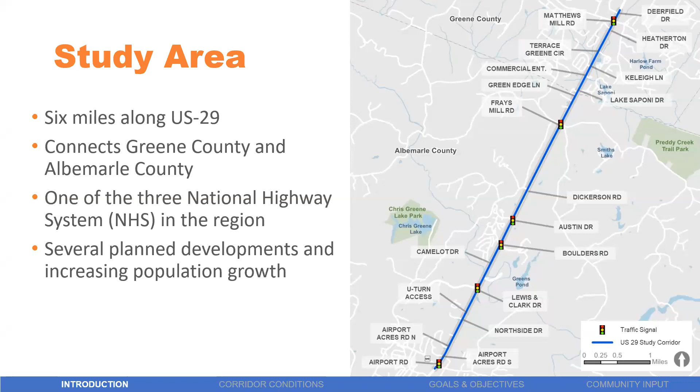Really, this project is intended to be multimodal, right? It's not just about moving the cars on US 29. It's really thinking about moving people through this corridor, whether that be by transit, by bike, walking, and of course vehicles as well. We're going to assess those future travel projections and development patterns and really understand in the future what that baseline condition is and what we need to solve and what we need to look at more closely.

Once we have that understanding, we will generate a range of solutions, improvements, and enhancements to address the study goals and objectives, and we'll share those with you in detail shortly. Again, really focused on several key elements: mobility, safety, economic development, you name it. And ultimately, we're going to test the application and the relevance of those solutions, bring those back to you in draft form, again, just like this, to gain and gather your input and feedback.

You are the users of this facility on a day in, day out basis. You know the corridor and the region better than most. And so your feedback is really valuable to the project team to help identify the proper and best solutions that meet the mobility and safety needs of the corridor, but also the community.

And with that, I will turn it over to, I believe, Andy, who's going to start us talking us through, or is it Kylie? I'm sorry. That's all right, it's Kylie. Okay, thank you Chris.

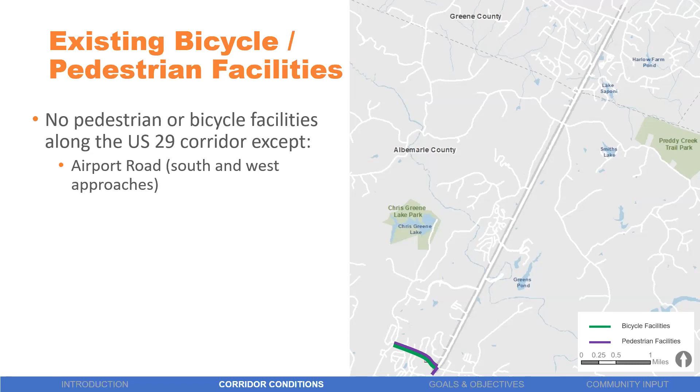Similarly, there is a lack of existing transit facilities on the corridor. So 2 transit services run in the vicinity of the study area, both of which are stakeholders of ours on this study: Charlottesville Area Transit, or CAT, and Jaunt. Jaunt runs a connect line for commuters into Charlottesville, and its closest transit stop to the study area is about 900 feet south of Airport Road, so technically out of study limits, but in the Hollymead Town Center by the Food Lion, while CAT's closest stop is 3 miles south of Airport Road at the Walmart off of US 29.

Now, shifting gears a little bit into crashes along the corridor, we pulled crash data from 2015 to 2020 to get a sense of existing safety conditions. There were 798 crashes along the corridor in that time within our limits. 33% of those reported injuries or fatalities.

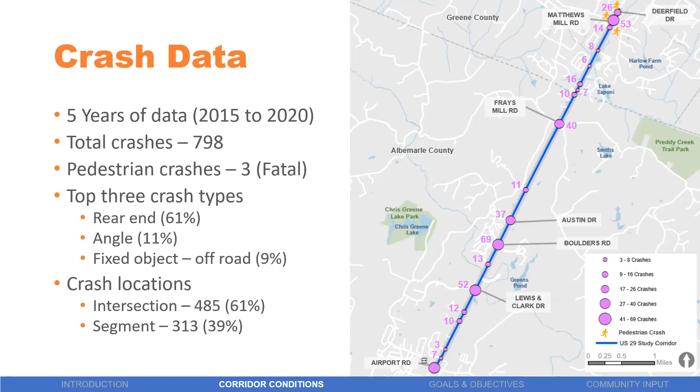The 3 fatal crashes all involved pedestrians between Deerfield Drive and Heatherton Drive to the north in Greene County. Rear end crashes are the most common type pulled from the data at 61%, followed by angle crashes and off-road fixed object crashes. So you can see from this graphic, most occurred at intersections, about 61%, whereas the remaining 39% occurred throughout the corridor, outside of 250 feet of an intersection.

So now I want to get into traffic operations, which analyzes essentially how a roadway is functioning. This graphic is helpful to understand the term level of service, which we will be referring to in the upcoming slides and in the public materials that you can also access on the project website. Essentially, level of service, otherwise called LOS, is a metric used to determine the quality, essentially, of an intersection.

It is based on a scale of A through F, where A is best - it's the ideal free flow conditions, you're all smiles, living the dream. And F is poor, significantly delayed conditions, very stressful. And so in urban conditions, we aim for a level of service D or better as engineers.

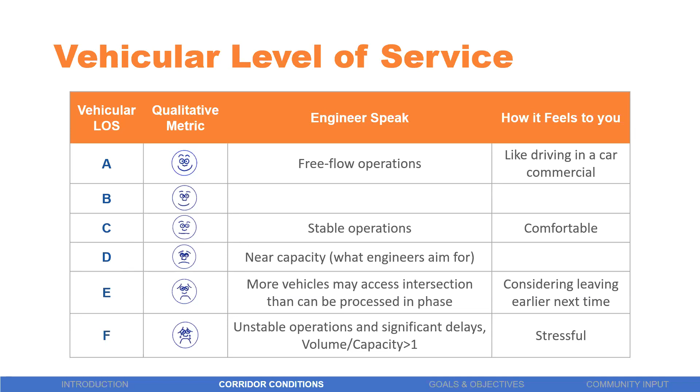Taking a look at the AM period, there is heavy southbound through traffic along the corridor during the intersection peak hours, which makes sense given the morning rush for commuters into the city of Charlottesville. This graphic, along with the ones on the following slides, have bubbles for the different types of level of service.

Your green bubble is level of service D or better. Level of service E is a yellow bubble, and level of service F is the red bubble. Additionally, 2 intersections are over capacity in the existing conditions today in the morning period, and those intersections are Frays Mill Road and Airport Road at US 29.

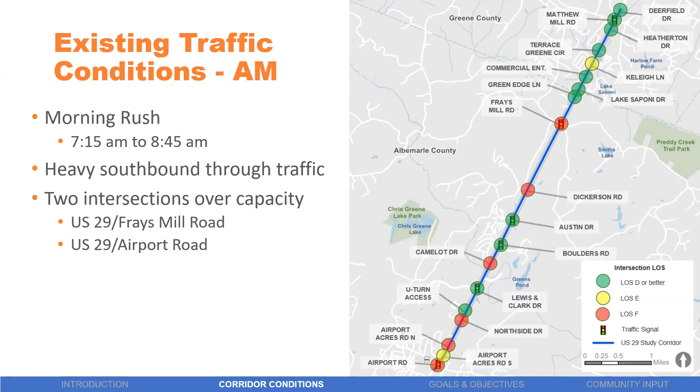Shifting into the PM now, we see a less strained corridor with overall less capacity and level of service issues. But you see that directional shift of, instead of southbound traffic towards Charlottesville in the morning, you're now seeing them leaving Charlottesville headed northbound in the evening.

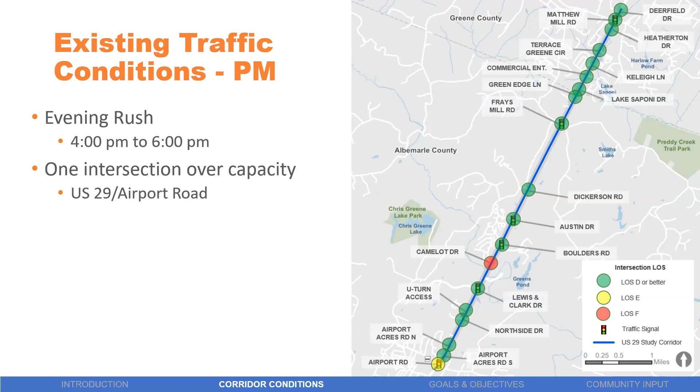An additional 2 intersections operate at worse than a level of service D, and Airport Road is the only intersection in this case that ends up being over capacity, where the volume just exceeds the capacity that's actually able to be processed.

Before I get into future no build conditions, which we did take a look at for year 2045, we have to consider what planned improvements are moving forward or proposed along the study corridor. The largest roadway improvement is the Route 670 connector, anticipated to be a 2-lane road connecting Route 670 to US 29 by the year 2025.

In addition, 3 new signals are also planned and tied directly to site development in the areas of Heatherton Drive and the Northside Drive RCUT that's existing today. In our no build conditions for year 2045, we assumed these improvements and analyzed the corridor. All other intersections we assumed to remain as they are in existing conditions today.

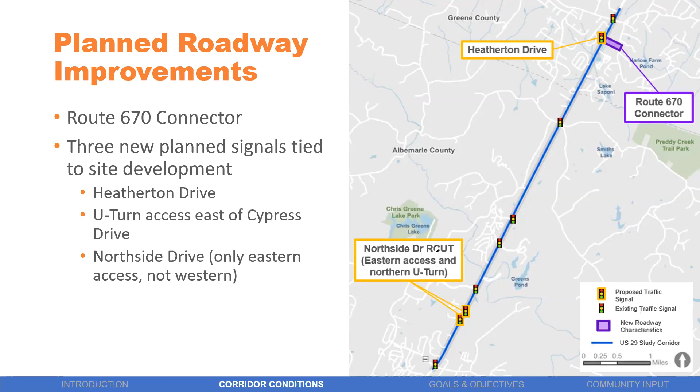In the future no build traffic conditions, a growth rate was applied to volumes based on the statewide planning system's historic growth graphs. We see the morning has a number of intersections operating at level of service E and F now, with 5 intersections over capacity given the growth, which is 3 more than what we saw in the existing conditions for the morning.

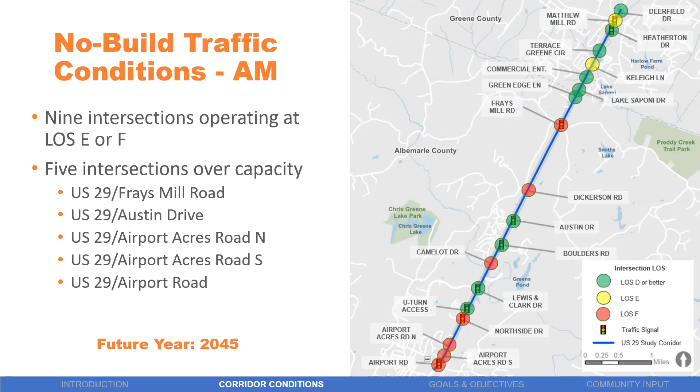I provided you with all of the corridor conditions, existing and anticipated, that we know of right now for US 29 within our study area. So now I'll pass it off to Andy Butzik to present goals and objectives for the study.

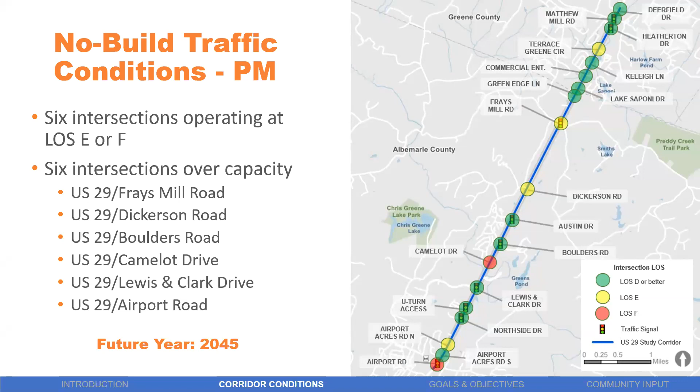Thanks, Kylie. This is Andy Butzik, also with Kittelson. As Kylie highlighted, under the 2045 no build condition, or the do nothing condition, we're expecting some operational and safety challenges along the corridor. But luckily, you have some great local agencies who are being proactive in their planning and looking to make improvements along this corridor in the meantime, so that those hopefully never come to fruition.

So the ultimate vision for this corridor is that it's a corridor that provides safe travel and adequate capacity for all uses and users of the roadway. That's sort of a feel-good statement, so it's kind of hard to fathom. That's high level - what does that mean?

In terms of the actual study we're doing here, we've developed a draft set of goals with the project team and the stakeholders, and we'll walk through those on the next couple of slides. As Chris mentioned at the beginning, these are just draft goals. We'll be looking to get your feedback through a survey that Chris will highlight in a few minutes.

The first goal is to improve safety, and this can be accomplished in a number of ways. The first is to reduce or manage the number of vehicular conflict points, so if vehicles never cross paths, there's less likelihood that they'll crash. Or if they do crash at an angle that's not perpendicular, reducing that severity of crashes can go a long way toward improving safety. Another way is to provide pedestrian crossings and opportunities along the commercial areas.